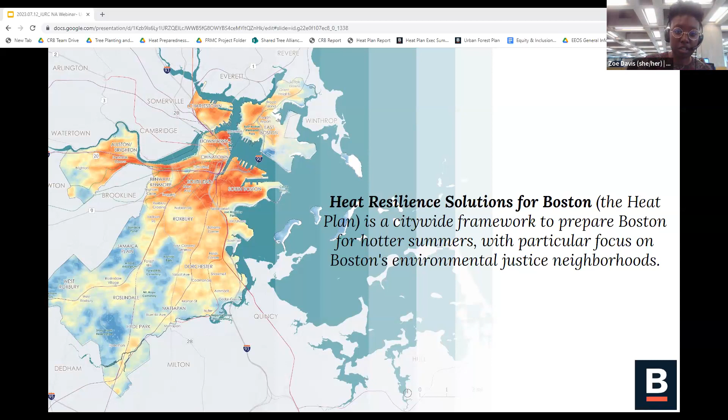Moving into the strategies broadly across the heat plan, there are 26 strategies to increase access to cooling resources and reduce localized extreme temperatures. What you're seeing here are the layers, these 8 layers of different approaches where the strategies are nested within. The first row includes more operational communications and awareness-based strategies, and the second row is associated with those that will reduce localized extreme temperatures and address heat associated with buildings, parks, streets, and how we can integrate zoning to support that.

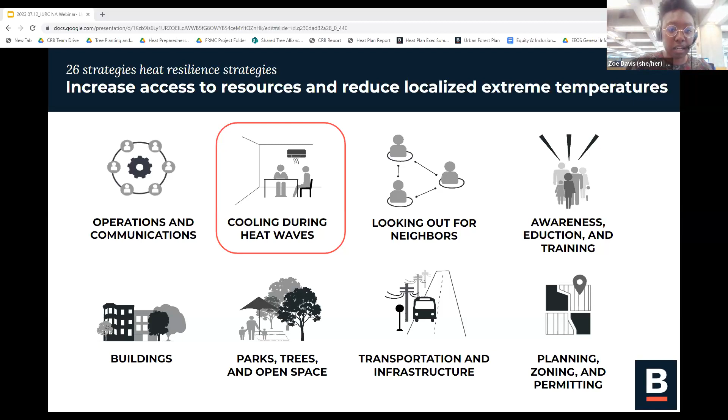I'd like to turn your attention to this one highlighted strategy in red, providing cooling during heat waves. Within that layer, this strategy is called enhancing the network of cooling. This is a strategy around building out a citywide cooling network. Here, the term cooling network we use fairly broadly. It can refer to a communications network, a programmatic network, but also a network of physical spaces, both indoor and outdoor. For now, though, I'm going to focus on the networks of physical spaces in Boston.

Overall, the goal here with this strategy is to ensure that we're increasing access to cooling spaces. One, by increasing awareness about them: where are they, what are the services that are provided. And enhancing the capacity of the existing cooling spaces. And then finally, identifying new ways or places to provide cooling.

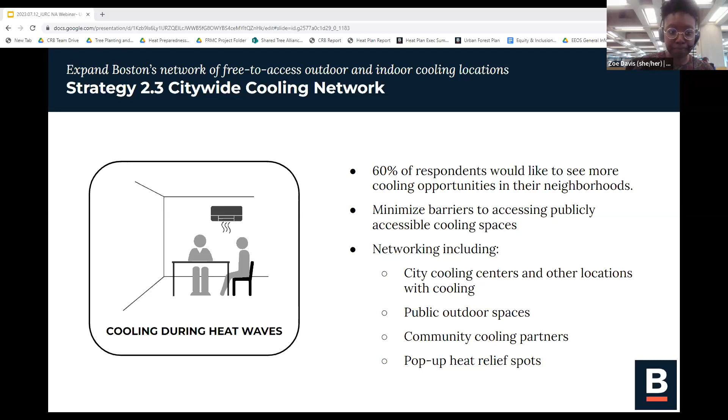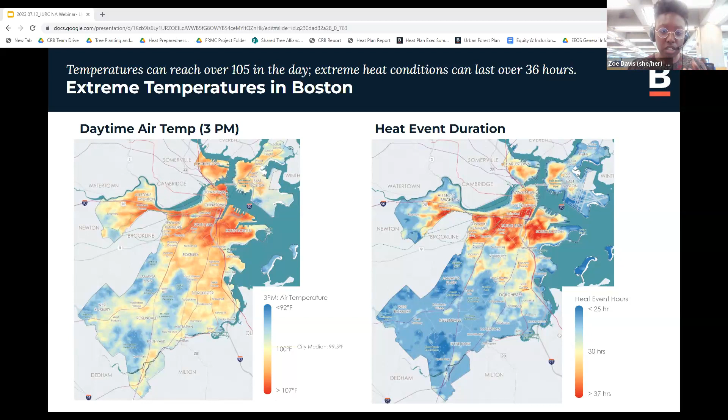Looking then at our heat event duration map, this includes extreme temperatures that are higher than 95 degrees in the daytime and don't get lower than 75 degrees in the evening. The trends here primarily follow denser parts of the city to the northeast, but the coastal areas and areas in the southwest, which are typically higher in tree canopy coverage and lower in building density, are able to cool down over time. But it's important to note that all of Boston gets extremely hot during heat waves, so blue only means slightly cooler, but during heat waves can still be above 90 degrees.

So as we implement heat resilient strategies, also identifying the areas of social vulnerability alongside extreme heat risk, this is going to help us ensure that we are addressing the needs of residents who experience the greatest impacts of extreme heat alongside compounding socioeconomic impacts.

Following the development of these temperature maps, we also conducted an analysis using what's called the Homeowners Loan Corporation map. We used the map from 1938 alongside extreme heat and land coverage metrics to better understand the impacts of historic development practices on the spatial distribution of extreme temperatures.

As background, the Homeowners Loan Corporation map was used previously in the 30s and 40s to rate the riskiness of mortgage lending, and this was largely based on race. These determinations limited where, especially people of color and lower income communities, could essentially receive loans and build wealth.

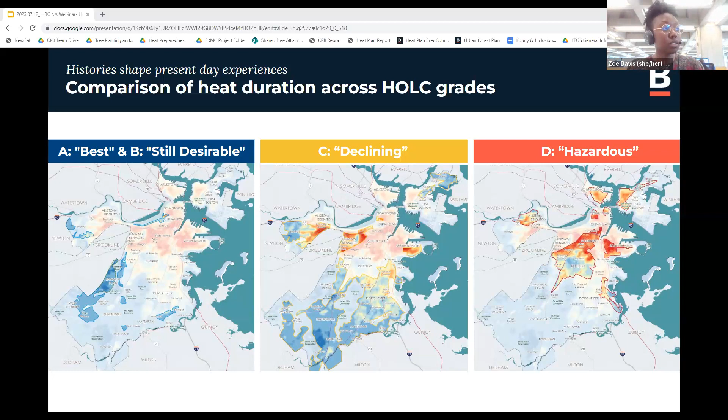So that has essentially influenced the structure of development in the city. What you're seeing here is the comparison of those 4 grades relative to heat duration. Just by visual comparison, you can see there's a stark contrast between the areas that were graded best or still desirable in the city versus areas that were graded hazardous.

This is showing a breakdown of the heat metrics we are looking at: the daytime and nighttime temperatures, as well as the land surface temperature and urban heat islands index, and then our green space metrics as well, looking at parkland, percent tree canopy, and percent impervious surface.

The takeaway here again is that areas that were graded best or still desirable are overall cooler. What we have seen is up to almost 8 degrees cooler in the daytime and almost 4 degrees cooler at night. In addition, areas that were graded best or still desirable previously now have up to 20% more parkland and 40% more tree canopy coverage.

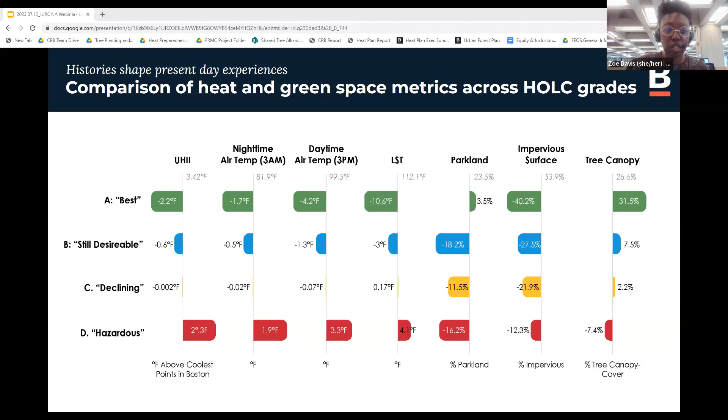So this information is informing how we're thinking about the implementation of our heat resilient strategies overall. But this is just to show the specific areas in the plan that we focused on based on this cross-section of social vulnerability, historic disinvestment, and extreme heat risk.

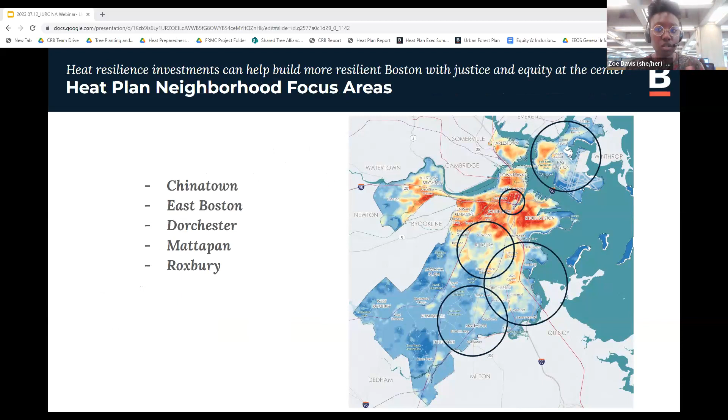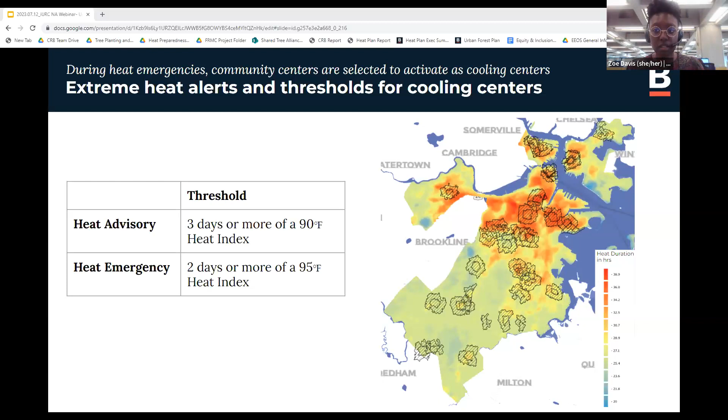Just to clarify, the circles that you're seeing are the 5-minute and 10-minute walk sheds going towards these locations. But the cooling network in Boston is a bit more expansive than that.

This is an image of both our indoor and some of our outdoor public facilities that we use, not just during extreme heat events, but are open outside of those events. This includes the cooling centers, but also our libraries, as well as outdoor spaces, both city and state owned, and specifically our tot sprays.

You may notice some gaps in the network, particularly in the central and western parts of the city that are this lighter bluish green. These are actually parks and water bodies that are a combination of city and state owned and maintained. They're just not captured in this layer, but they are definitely a part of our cooling network. This is an image of our 10-minute walk shed to some of these spaces.

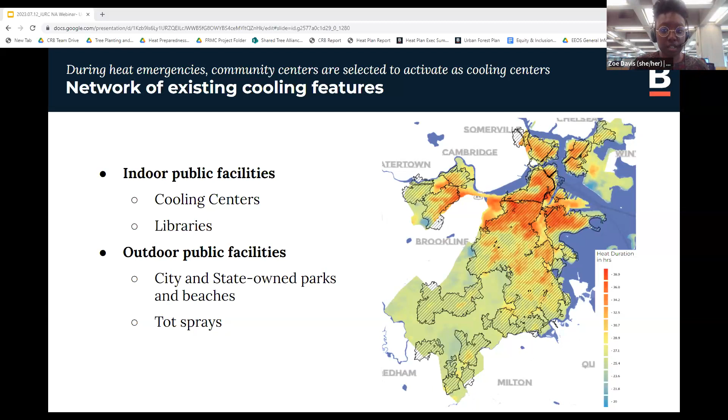Moving into some of the ways that we're expanding our network of cooling spaces, while we do have geographic coverage, it's still important for us to increase accessibility in cooling spaces. I'm going to share a couple of those programs quickly.

This is an example of our pop-up cooling kit program. The purpose was to provide a mobile resource for community-based organizations hosting their own events during the summer. The program was set up so folks could reach out and apply for a kit, receive it at their event, and be responsible for maintaining it until they return it again—much like checking out a book at a library.

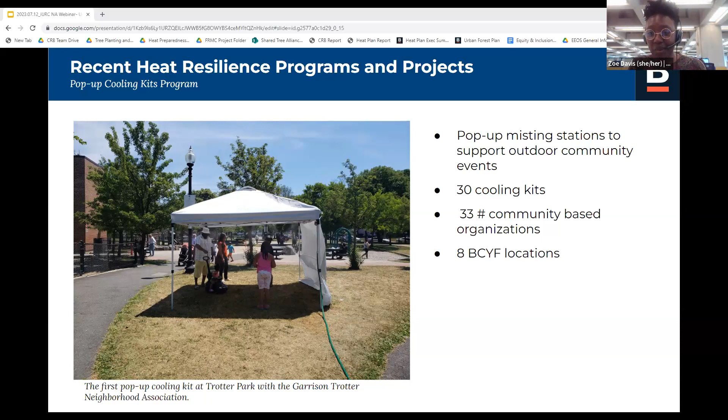The purpose of this was to provide misting during events. It was really great to see good feedback from community members on their experience accessing this resource, and ways we can improve it, because it was a very clunky resource, but folks have been asking for it again this year as well.

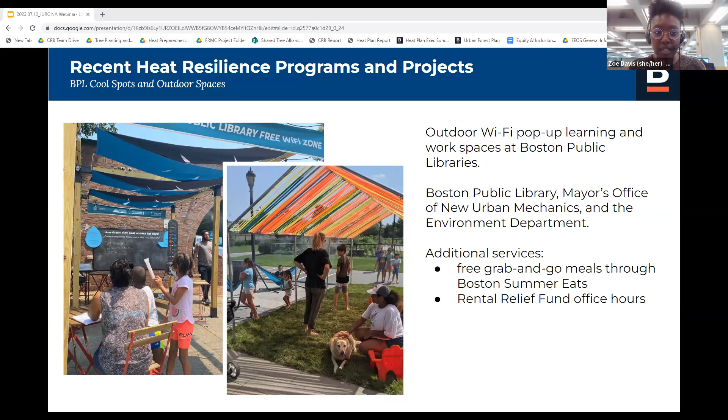The final project I'll share is our cool spots and outdoor spaces at libraries. This was a program we began during COVID quarantine to ensure that folks, even though they couldn't come into the library at the time due to limited access, would have space outside the library to safely engage, with some other resources for residents and a bit of a hub to reconnect during that time.

I will conclude there, but I'm looking forward to hearing from colleagues in Barcelona and discussing further with y'all afterwards. Thank you.

Thank you so much, Zoe, for that comprehensive presentation. As always, I know Boston is so conscientious about including equity in almost everything you do, and this is an issue where that is so important. I really like the pop-up cooling stations. As these heat events happen, even outside of the normal hot summer days, we expect to be able to be agile and respond to communities and reach more people. That seems like a great project.

Thank you so much for that, and really looking forward to hearing now from Barcelona, having a discussion later, comparing how both cities approach these similar issues through this transatlantic lens. So without further ado, I'm going to introduce our three next speakers from the metropolitan area of Barcelona, who'll each tell you more about what they're doing in their roles.

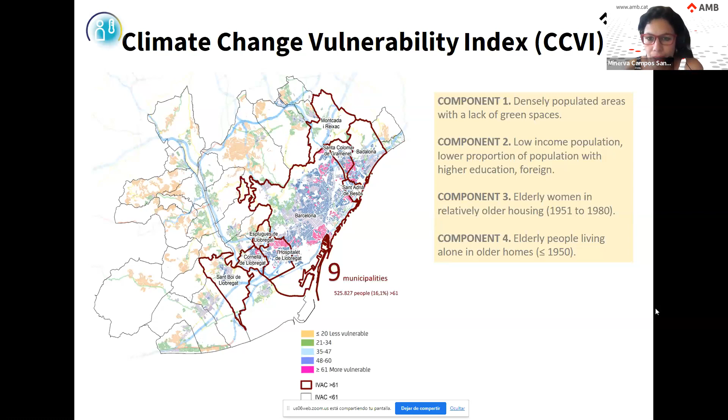As well as other socioeconomic variables. So when we decided to start working with this topic of climate shelters, the logical starting point was to make an exploratory study. We started by doing a benchmarking to see what's happening in other cities and regions of the world.

From this first step, we defined the criteria and the main typologies, and identified potential public facilities and private facilities such as theaters or cinemas. Also, some schools can work as climate shelters, and of course urban parks. We also defined the minimum size of green areas at over 0.5 hectares, with a normalized difference vegetation index of 0.4.

We also overlapped the information related to vulnerable population, considering people over 65 years old and children from 0 to 5. With this information, we calculated the walking distance at 10 and 15 minutes to these different potential climate shelters, and we were able to see that at the metropolitan level there are a lot of potential indoor and outdoor spaces that can work.

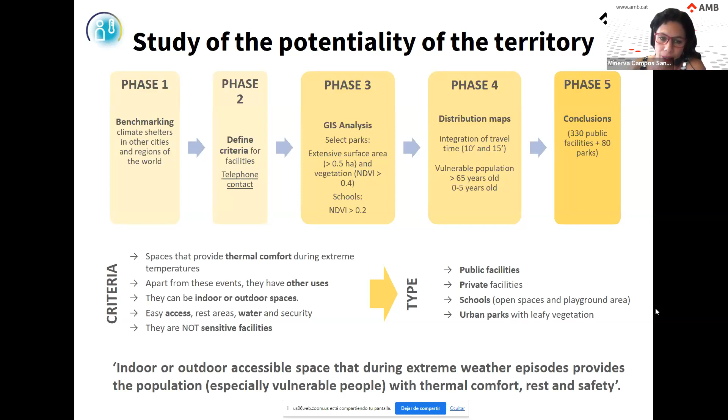So we decided to identify bioclimatic guidelines, and we published this bioclimatic criteria guide to improve the quality of parks. These criteria are actually part of what the architects of public space are applying to the design of new climate shelters, and Sara will explain this later.

In 2020, we presented these results to the different city councils of the metropolitan area, and made a voluntary call to create the network. We started in 2021 with 7 municipalities and 20 climate shelters. This year we have 11 municipalities and 74 climate shelters, and we're now having conversations with another 4 municipalities, so probably in 2024 there will be 15 municipalities.

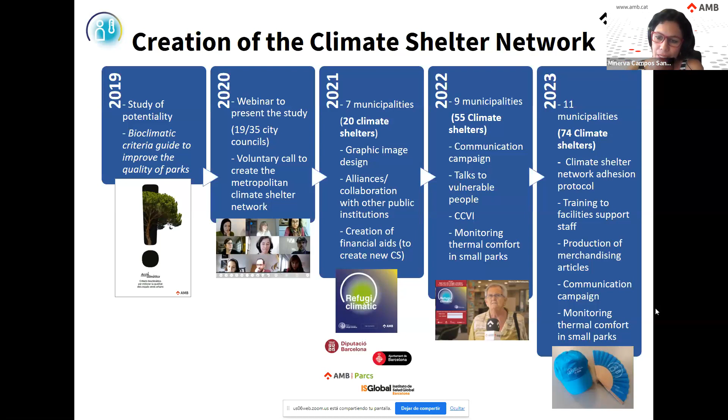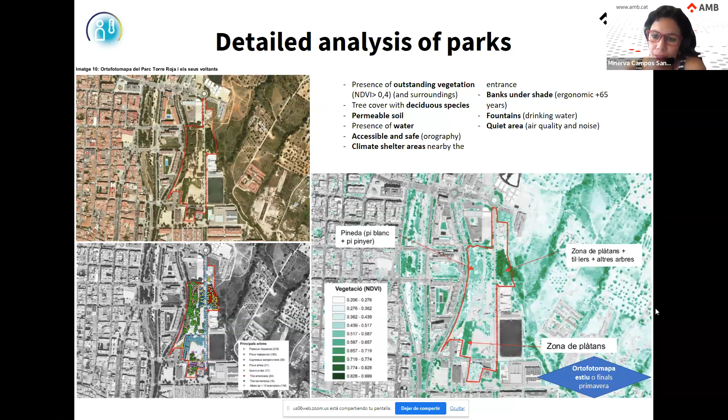As part of the work when we receive a new request from city councils to include a new climate shelter in the network, we do a very detailed analysis of the space. This is an example of the analysis we made for one park that already belongs to the network, checking that all the criteria we previously identified and selected during the study really work in this space.

Another important thing for us is to improve our knowledge of which variables are determining thermal comfort. For instance, last year we tested small parks and realized that small parks, smaller than 0.5 hectares, can provide thermal comfort in a very similar way to bigger parks. We applied the UTCI, the Universal Thermal Climate Index, and could see that inside and outside the parks, the range of temperatures is really different.

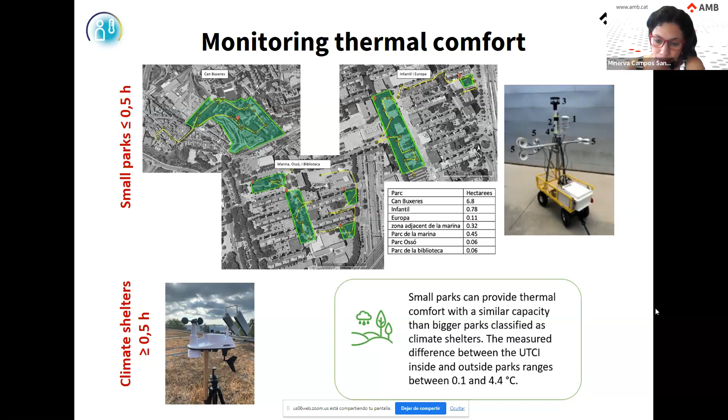Another important event that happened during 2021 was the creation of an investment plan to promote sustainable projects at the metropolitan level. With a total budget of 100 million euros, one of the 15 lines was the creation of new climate shelters. In the coming years, we'll have an investment reaching a little bit more than 6 million euros, and some examples of these projects Sara will explain later. Thank you.

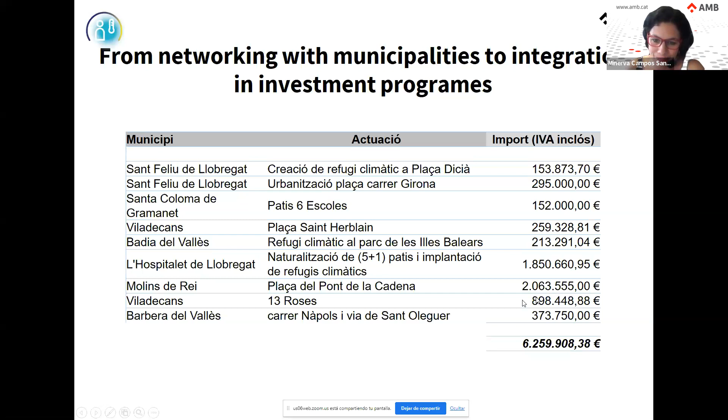In my case, I'm going to explain about the small-scale climate shelters we are developing in the metropolitan area of Barcelona. At the moment, we're working on 8 climate shelters in public space, and further on I'm going to explain 2 of them, Illes Balears Badia and 13 Roses Square in Viladecans, as 2 examples of projects located in very different conditions.

Yes, these are the ones that just were remarked.

Our workflow is based on 4 points. First, we select multidisciplinary teams through design competitions, creating teams with urban and landscape designers, biology and environmental sciences, bioengineers, and simulation experts. We develop preliminary designs with bioclimatic strategies, make environmental simulations with the software ENVI-met, and then develop the projects.

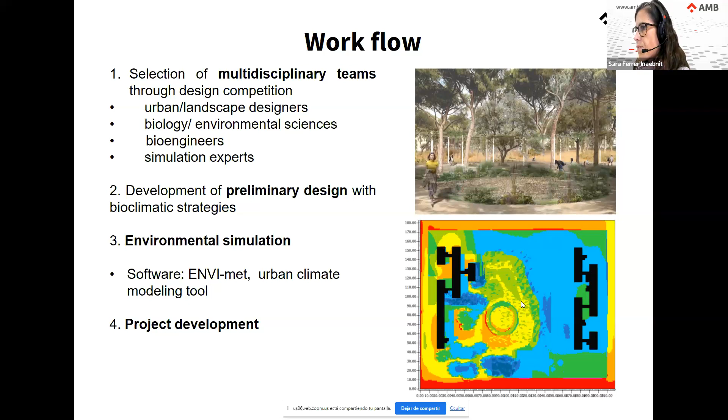The bioclimatic criteria we rely on to achieve thermal comfort on our climate shelters are based on 4 points: location, vegetation, water, and materials.

In location, we look for multi-shadow sites and analyze wind conditions and airflow. In vegetation, we try to maximize dense vegetation capable of evapotranspiration. With water, we try to bring water next to our climate shelters by placing fountains, naturalized water ponds, or water playgrounds. With materials, we always try to choose ones with low albedo and basically draining pavements.

Here we incorporated 3 historical references of our Mediterranean architecture, where you can clearly identify solutions to these criteria. These are solutions that nowadays we somehow lost in public space, and we see now that we have to recover them and parameterize them. But somehow we're not inventing anything — we have to recover solutions that we used in the past.

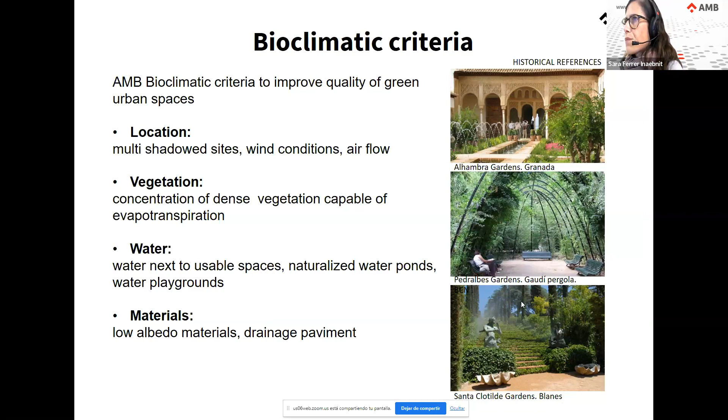As I told you before, I'm going to explain a little bit about two of the climate shelters we're working on. One of them is Illes Balears Park in Badia. This project is located in quite propitious conditions because it's in a park of more or less 18,000 square meters, covered by a low density of old pine trees. The project is led by the team Carles Enric Studio, who chose to concentrate this climate shelter in a remarked circle of 1,000 square meters.

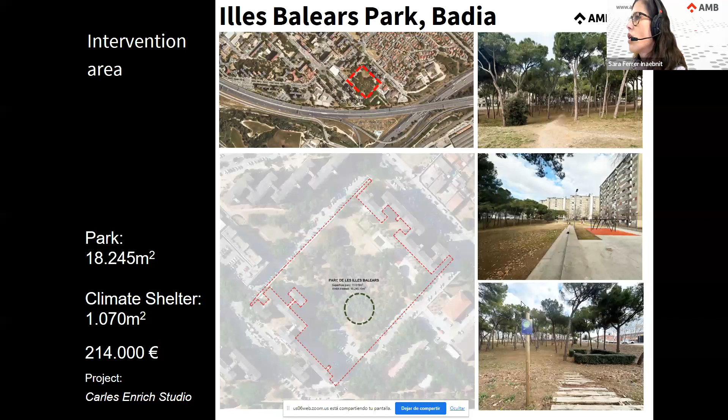Next. The 5 strategies to develop this project were, first, to focus the action at the lowest point of the topography of this park, so we could maximize the collection of rainwater.

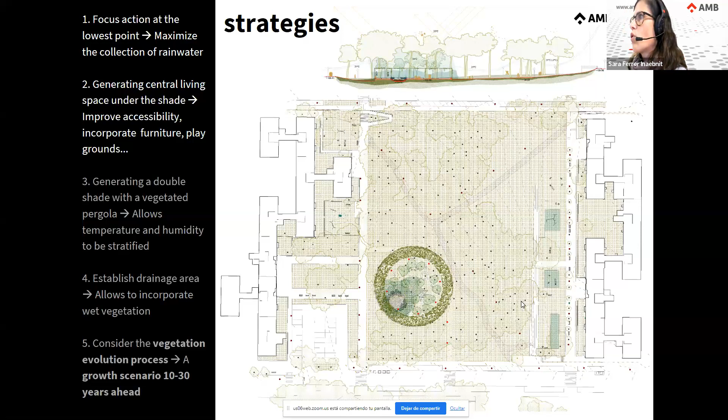Second, we chose to generate a central living space under the shade by improving accessibility to this new area, incorporating furniture and playgrounds. Third, to generate shade under the pine trees with a vegetated pergola, which allows temperature and humidity to be stratified.

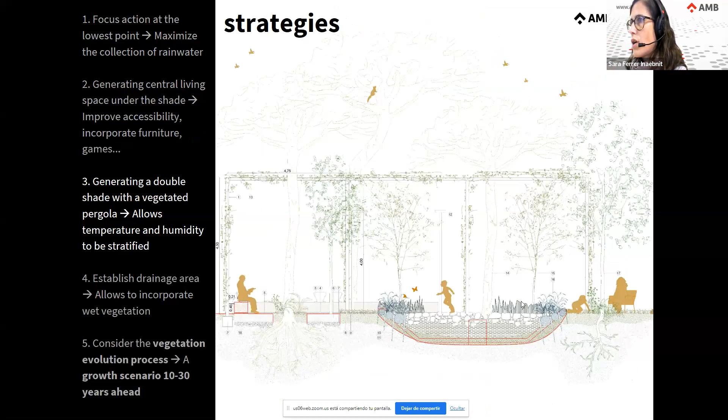The fourth was to establish draining areas that allow incorporating wet vegetation. And the fifth point was to plant a variety of deciduous trees and consider the vegetation evolution over the next 30 years, so we could analyze how it would improve conditions at this place.

Next, this project we simulated with the ENVI-met tool. We modeled the park without the vegetated pergola, which is the project, and then with the vegetated pergola.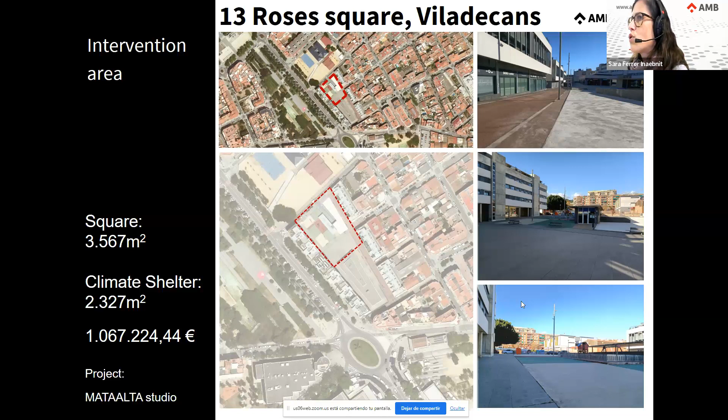Next, in this case, the 4 strategies we used to develop this project were: first, we evaluated the structural capacity of the existing square, because we had to be able to optimize the layout of earth needed to grow the vegetation correctly.

In the three photographs we incorporated, you can see similar projects by the same team that were also built over a roof of a building, where you see that vegetation grows properly.

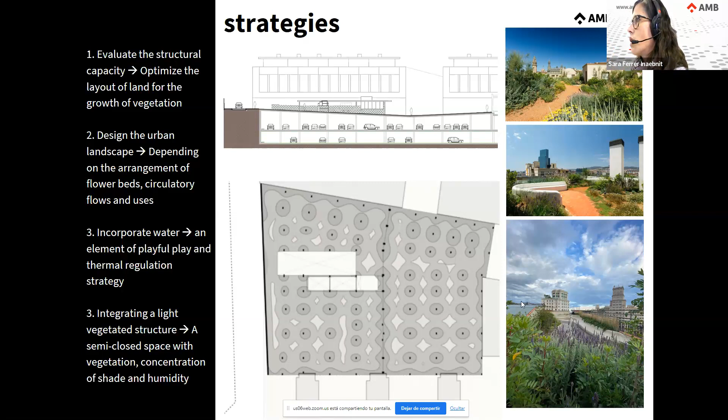Next, the second strategy is to design an artificial urban landscape by identifying the pedestrian circulations, and in the places that remain, we designed flower beds and other living areas.

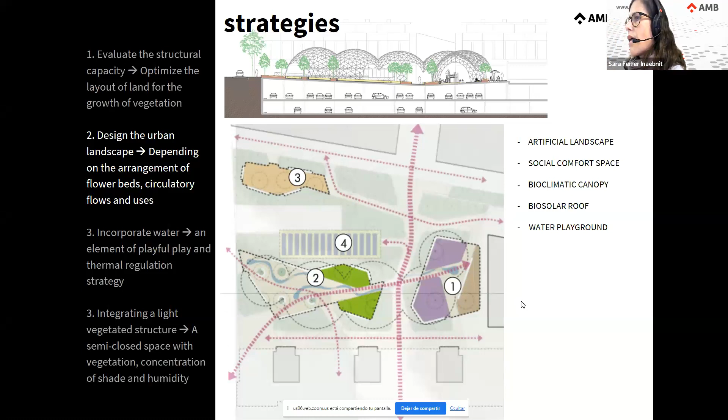The third point, next: to incorporate water as an element to play with, and at the same time as a thermal regulator. And the fourth and last point is to incorporate a light vegetated structure that covers the whole square, like a bioclimatic canopy, to concentrate the maximum shade and humidity.

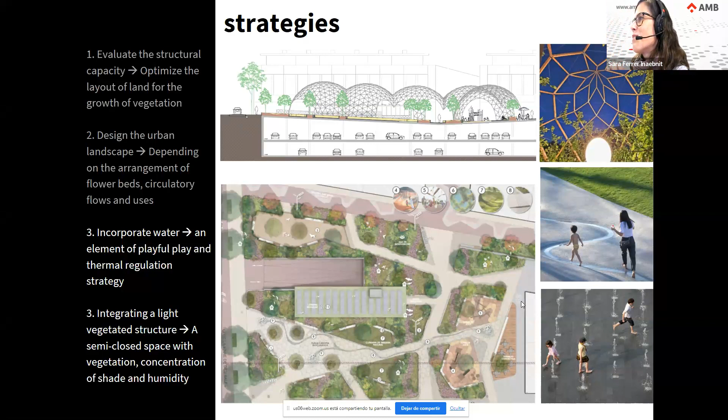And well, this is the last strategy and the end of my brief explanation of the small-scale shelters we are developing in the metropolitan area of Barcelona.

Hello, I am going to present now the sustainability protocol. Besides all these projects and all these climate shelter criteria that we saw with the previous presentation, we have a sustainability protocol that we apply to all the projects and works that we do.

We mostly do, 75% of the projects we do are public space projects, so including parks, streets, and squares. Some of the squares or parks are considered climate shelters, but for the rest of the projects that are not considered climate shelters, we also apply some criteria in order to avoid the heat island effect and to promote green surfaces.

Okay, so next please, Minerva. This is the protocol. We have the quick guide in English on our website, because the full version is only in Spanish and Catalan. It's divided into 19 criteria regarding transversal analysis and follow-up of the project, in order to establish the strategy. It takes into consideration energy, materials, water, comfort and health, and site sustainability.

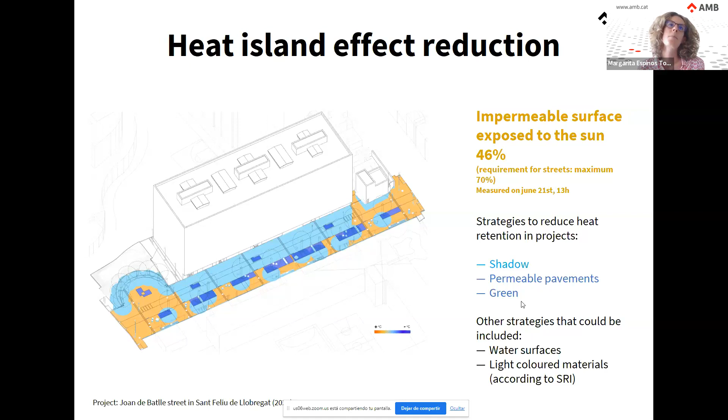a series of strategies that could help to refresh our cities. Can you go to the next, please? Yeah, this is the limits we established depending on the kind of project.

Streets, it's 70% of permeable versus impermeable pavement exposed to the sun. We mostly work on very little streets in the central part of the city, where it's very difficult sometimes to put in green or to have shade.

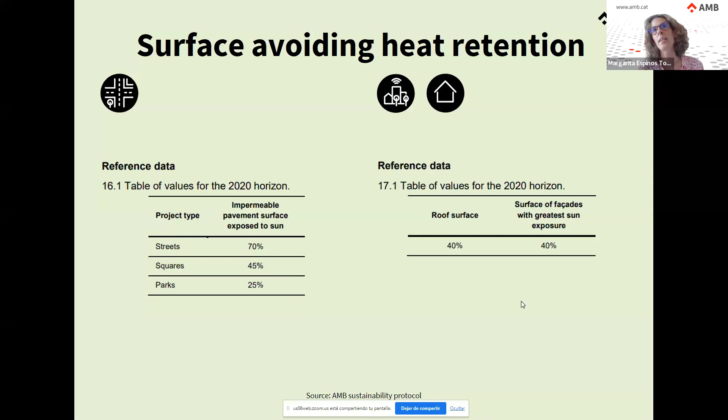So what we want to make sure is to be able to get to these limits in as many projects as possible. But of course, even if this limit can seem not very restrictive depending on the project, we always go for the best solution and reduce as much as possible the heat retention. So in squares, we have 45%, and parks 25% of the impermeable surface exposed to the sun. For buildings, we have also different limits for roofs and facades with greatest exposure.

And we can go to the next point. Yes, another one of the 19 criteria in our protocol is a minimum of green surface. We measure it with two different indicators. One is the green coverage, which is

like if we count the green overlap of all the layers, as you can see on your left. On the right, you can see the sum of vegetation layers. We set a different limit for this indicator, as we are adding all the surface of the different layers. In both cases, we are measuring related to the project surface area.

Okay, so in streets, as this example shows, it's the same limit for green coverage and the sum of vegetation layers, because in streets there's lots of things happening, like parking entrances, etc., that don't allow us to have a sum of vegetation layers a lot higher than the green coverage.

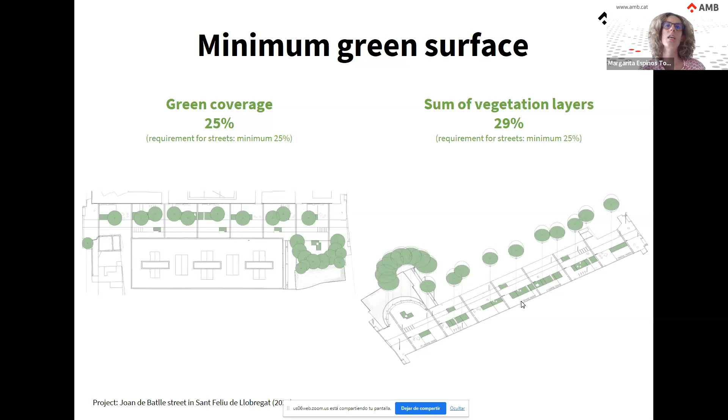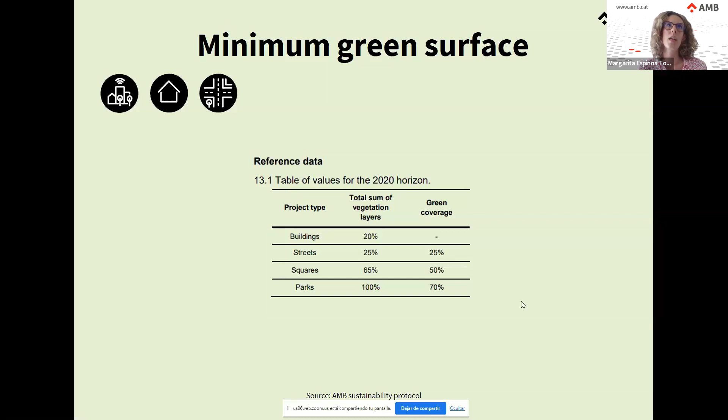Great, thank you so much. Thank you, Minerva, Sarah, and Margarita. Margarita, I think you still might be sharing your screen. Sorry, I think you might still be sharing your screen. I think it's Minerva. Yeah, I'm sharing. Sorry, I didn't realize. No, it's okay. How do I stop doing this? No, I think it's okay now. Okay, great, perfect.

Wow, that was, in 20 minutes, an incredible amount of information, very comprehensive, and great that the sustainability protocol is available in English—we'll share that link in the follow-up email. Just very impressive, the comprehensive nature of the work you're doing, and in a world with limited resources, the data and evidence base is so important, both to know what kinds of interventions and where to do them, whether they're working, and projections into the future, looking at vegetation 30 years down the road. So congratulations on the great work you're doing in Barcelona.

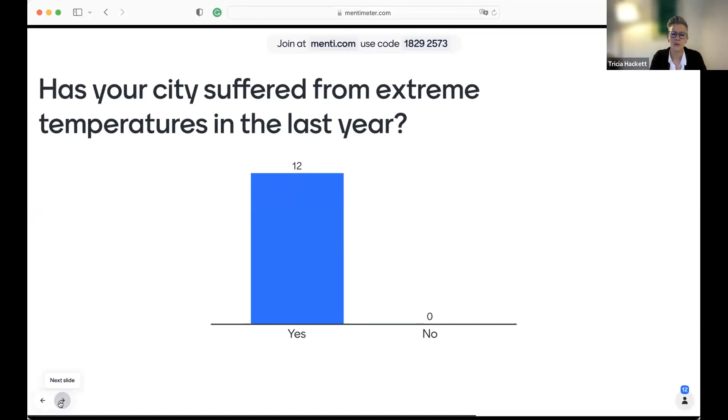Should we go to the next question, Susanna? This is where we're hoping for a bit of interaction: share a specific project your city is implementing to tackle extreme temperatures. I know there are those of you working specifically on this topic, so maybe your cities are doing something innovative or interesting you'd like to share—good to test the waters on what other cities or metropolitan areas are doing.

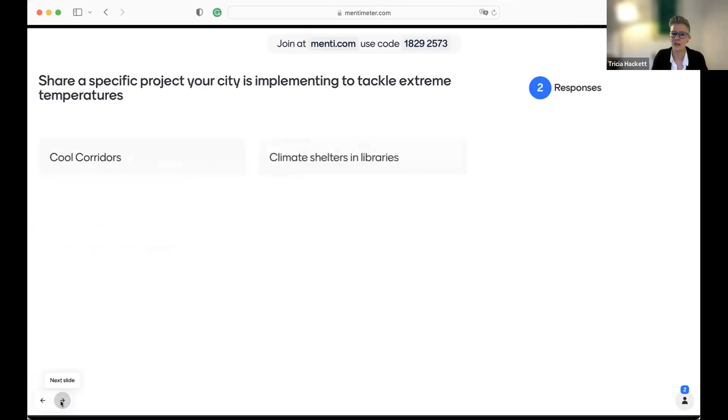Cool corridors—I don't know what a cool corridor is. I could guess, but I don't know specifically. Climate shelters in libraries, okay. Whoever put 'cool corridor,' maybe explain in the chat what that is—I imagine it's about vegetation, creating micro cool islands.

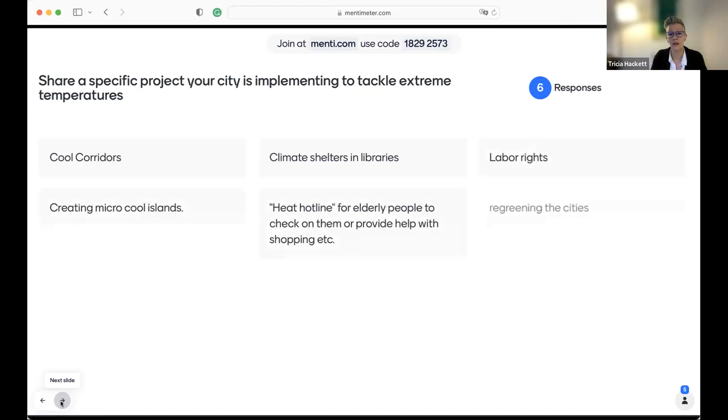Heat hotline for elderly people, to check in on them and provide shopping, etc. Labor rights, regreening the cities, ephemeral elements of shadow—okay, ephemeral elements of shadow. Conducting workshops with service providers and organizations to survey current protective measures and support needed.

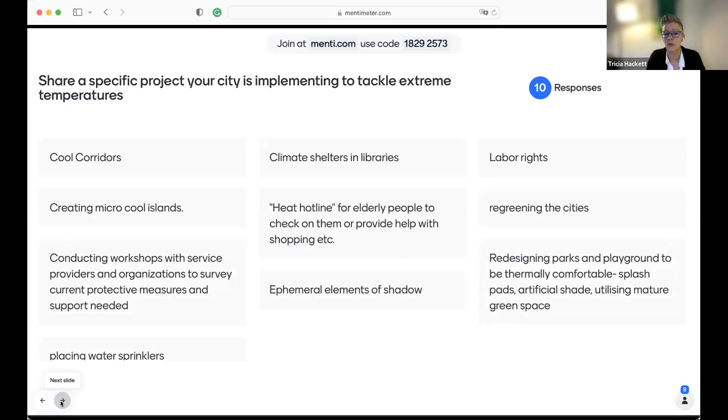Redesigning parks and playgrounds to be thermally comfortable. Splash pads, artificial shade, utilizing mature green space, placing water sprinklers.

Wow, you're all ready with these solutions. This is great. Using nature-based solutions, green infrastructure and public space.

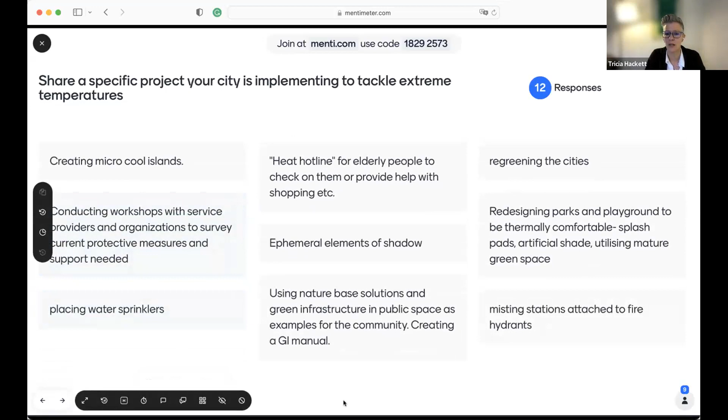Examples for communities, creating a green infrastructure manual. Misting stations attached to fire hydrants. Good urban comfort that's been included in public spaces.

Drinking fountains, going back to old schools, drinking fountains. Great to see drinking fountains coming back in so many places.

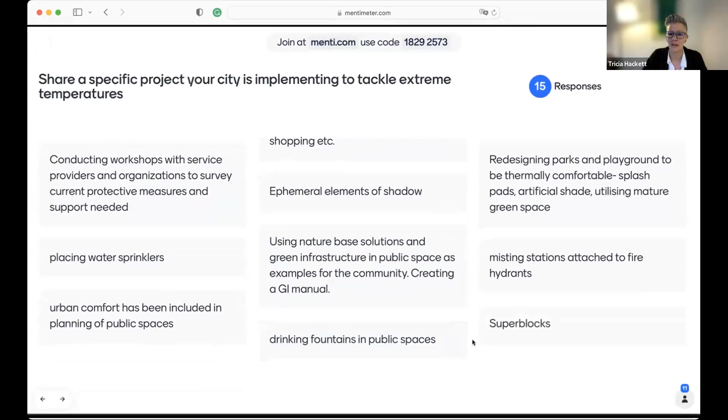Super blocks, they're wonderful super blocks. Oh, these are great. Thank you so much. You're ready to share your ideas.

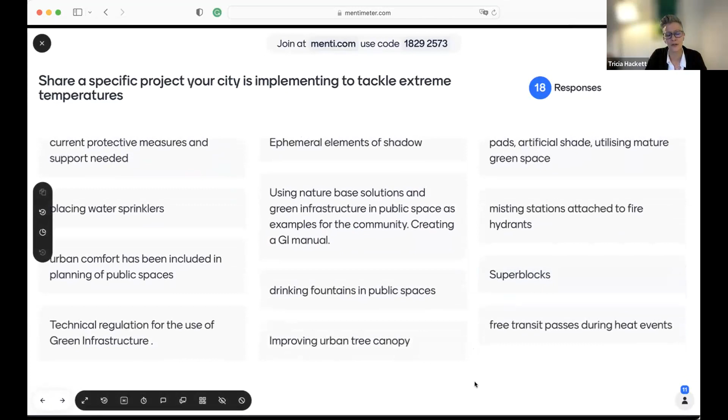Technical regulation for the use of green infrastructure, improving the urban tree canopy, get like drinking fountains, good old fashioned trees.

Free transit passes during heat waves. We're seeing more and more cities doing free transit passes.

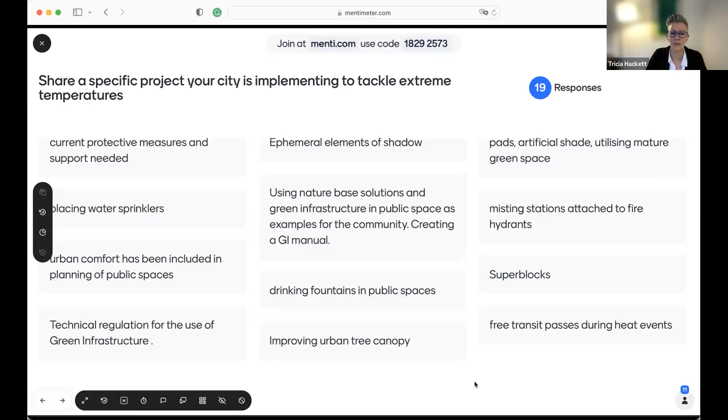Wonderful. Thank you all for jumping in. We don't do Mentis all that often, so it's nice to have leaving cities. Yeah, that's one option for some people.

Urban sea park, de-sealing. Great.

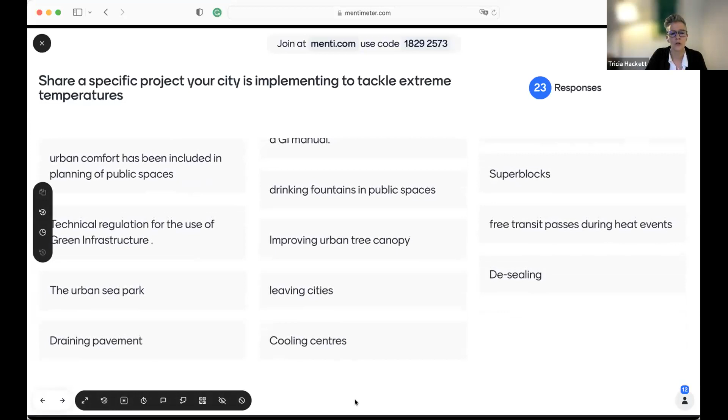Mark is saying cool corridors are rethinking transportation corridors in low-income communities that are shade-starved. This includes adding more trees, crosswalks, bus shelters, and a lot of this takes place on adjacent property. So it's a very comprehensive approach.

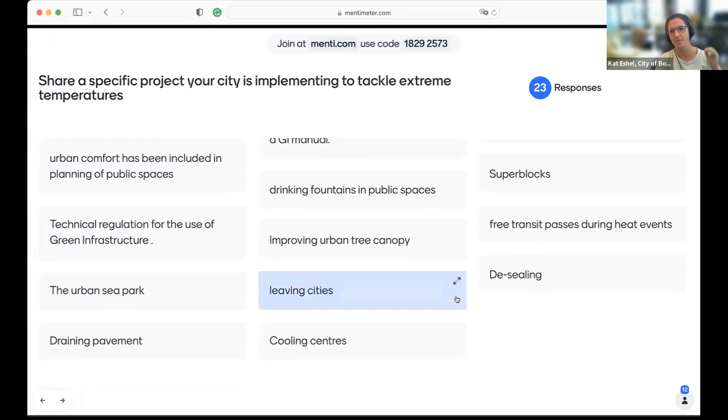Yeah, that's definitely something that we're thinking of in Boston. We have some federal grants to rethink a couple of our corridors in Roxbury. That was one of those environmental justice communities that Zoe had displayed on the map.

But to integrate green infrastructure, tree canopy expansion, cooler bus shelter designs, and trying to have it be a complete street, not just from a vision zero and safety standpoint, and sort of part of large mobility mode shift, but also creating a model to have deeper integration of the resilience aspects. So hoping to start work on that soon, and really excited about it, but absolutely.

Thanks for adding that in, Mark. Oh, great. Thanks, Kat, for that.

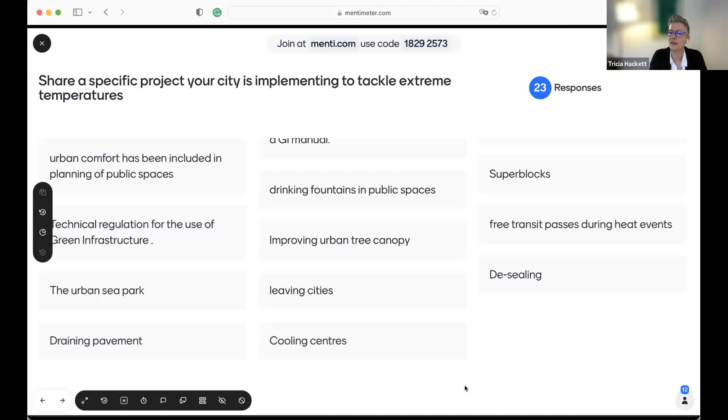I love it. We try to have these sessions be participatory, and sometimes we succeed. So thank you, oh, here we have one: not forcing people off at the end of the transit route, allowing them to continue to ride. Oh, okay. Yeah, very much an equity issue there.